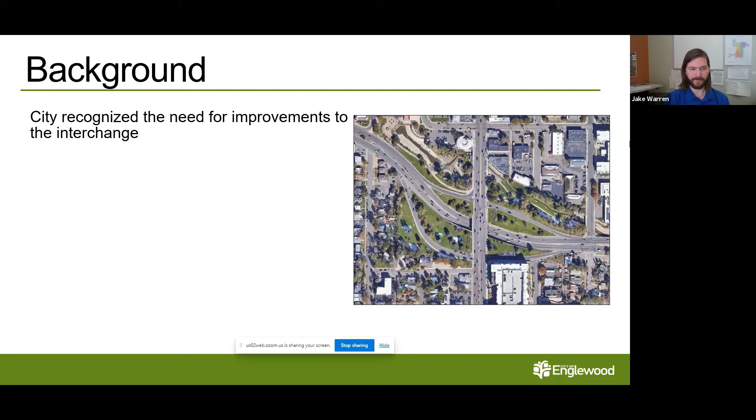So these are some of the issues that this project is going to look at, and as a regional connector with some proximity to downtown Englewood, this interchange has a big influence on the growth and economic vitality of the city. In early 2019, staff submitted an application for the Denver Regional Council of Governments 2020 to 2023 Transportation Improvement Program. Once the city was granted the funds, staff worked with CDOT to develop an intergovernmental agreement, which was presented to City Council for approval on May 28th of 2020.

This agreement, which is required for all federally funded local agency projects, sets the terms for utilizing the awarded funds. It also dictates things like which agency will manage the project, which agency will be responsible for maintenance, and when the funds must be spent by. Following execution of the IGA, the city solicited engineering services through a public request for proposals. We got 11 different submittals, and ultimately Atkins Engineering was selected as the most qualified firm.

Atkins has been working on the project since December of 2020. They've been busy establishing existing conditions, generating traffic models, researching environmental resources, and we're really diving in right now to the alternatives analysis and even getting to some of our preliminary cost estimates. Next slide, Dan.

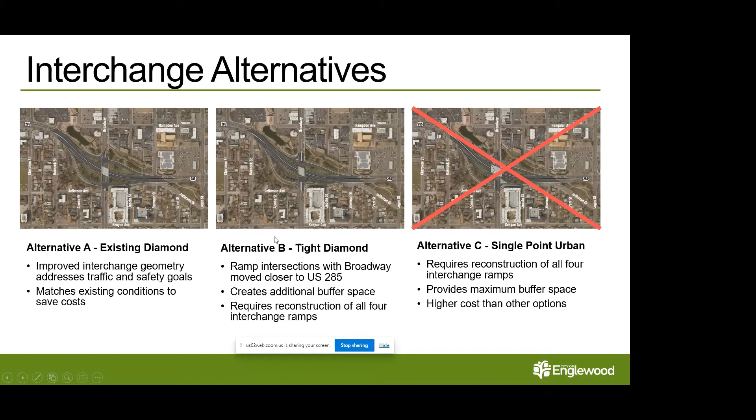So where we are today is we've moved into what we're considering a preferred alternative, which is essentially a combination of both alternative A and alternative B, picking the best benefits of each. We recognize that the additional buffer space is a benefit to the community for some additional green space, so moving those ramps in closer, like the tight diamond, is beneficial. It's moved in, maybe not quite as far—somewhere in between the two alternatives—but it still creates that buffer space. This helps minimize some of the reconstruction costs, so it's a balance.

We've also incorporated some geometric improvements. One of the bigger things you'll see is this southwest corner where we've moved the ramp a little further east, which has also shifted that intersection a bit to the north on the south side. So there'll be additional space in that southwest corner for some opportunities. And one of the benefits of the existing diamond is it creates additional storage across the bridge for turn lanes, which helps with operations and green time. So we've tried to balance that as well in the preferred alternative.

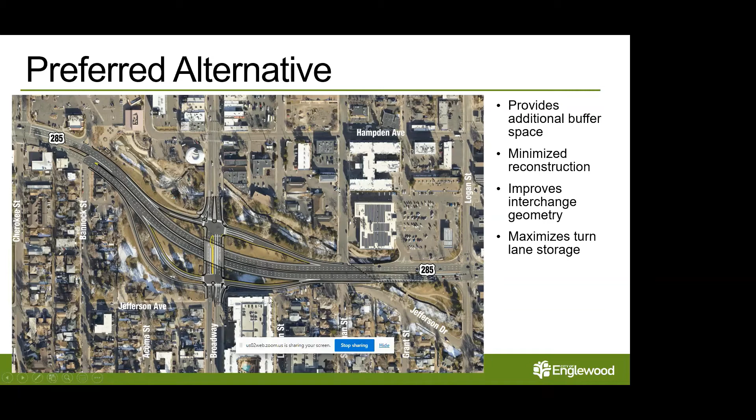The bridge width itself is generally about what it is today for the proposed bridge crossing, because there's some additional width today that's not being used on each side of the bridge. And this also maintains the 10-foot sidewalks that are out there today.

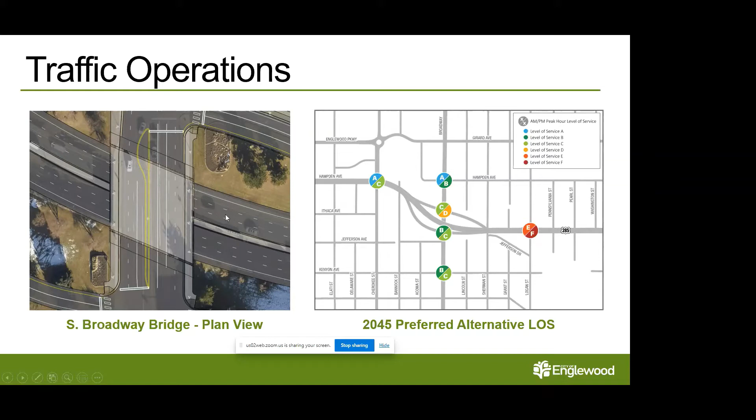From a structure perspective, we have a couple of options. One is what we call the two-span option, which is what's out there today with a center pier in the middle of 285. This allows us to keep the bridge section shallower, not as deep for vertical clearance wise, avoiding having to raise up the bridge to create that vertical clearance. So this does help us with those shorter spans.

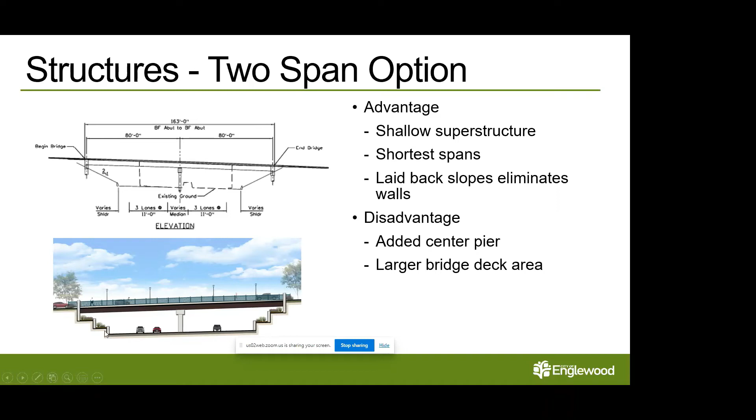Let's jump to that. So this is the other option we're looking at, the single span option, which doesn't have a pier in the middle. But in order to keep the superstructure to a manageable depth, and not have to raise the profile of Broadway, we do have the taller abutment walls, which are similar to what's out there today. Kind of creates that canyon effect.

So from a structures perspective, we're still evaluating that, but we're looking at a 2-span or a single span option and really haven't quite made that decision yet. From a cost perspective, both of those alternatives are probably within 10% of each other.

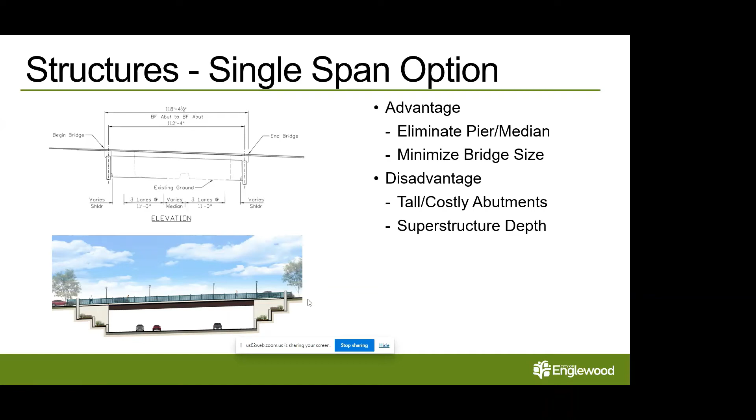One of the questions we've been getting, and we had this at the first public meeting back in February, was how we're going to build this and how this impacts traffic through the area and traffic to the businesses and those sorts of things.

So what we have here is essentially we're going to build this project half at a time. So in the first phase, we'll move all of the traffic to one side of the bridge - in this case, we would move all the traffic to the east side of the bridge, and then tear out the west side and build the west side of the bridge.

And then in the second phase, we essentially repeat the same process, just flopping it over to the other side. We put traffic onto the west side of the bridge, the new bridge constructed in the previous phase, and then we build out the east side of the bridge in this phase. And then we're essentially complete.

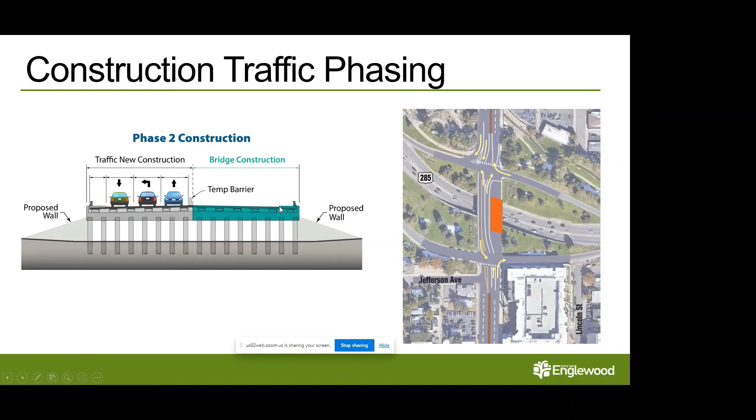As you probably saw, we're determining that configuration. We only have 3 lanes, so we have 1 lane north and south, and then a northbound left to the westbound. That requires us to close the southbound left turn movement to eastbound 285.

What we're looking at in this configuration is detouring that traffic at Old Hampden down Sherman Street, then back to 285. We picked this route because it's the more commercial business route, and we're not routing traffic through the residential neighborhoods.

And we've got signals at this location. We picked this movement for the detour because it has the lowest volumes, particularly compared to the northbound left, which has a higher volume. So this volume here is somewhat small.

We will have a public outreach campaign where we'll try to encourage drivers to find alternate routes and reduce volumes. There's probably other ways that folks can get around, but this volume here, the highest volume that we have in the peak hour, is the PM peak with about 98 cars on this particular route.

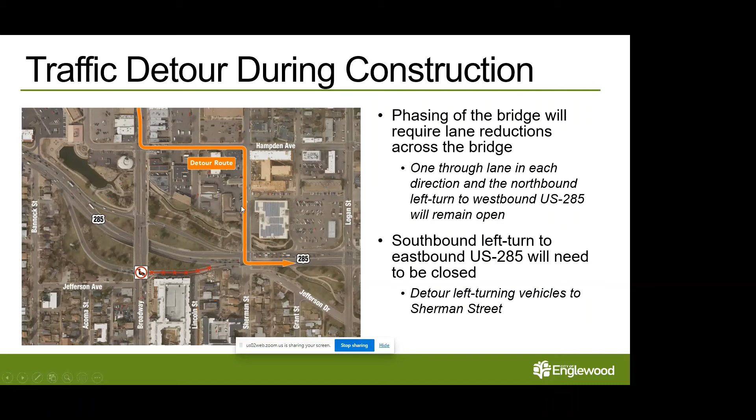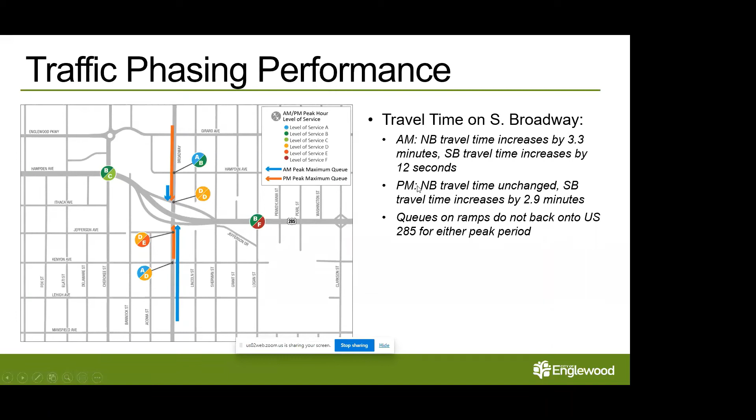So moving on from how we're going to build the project to how the project's going to look when we get done. As we talked about early on, one of the goals of the project is to create a gateway to the community. This is a key entry point gateway to the community, the downtown area of the city of Englewood.

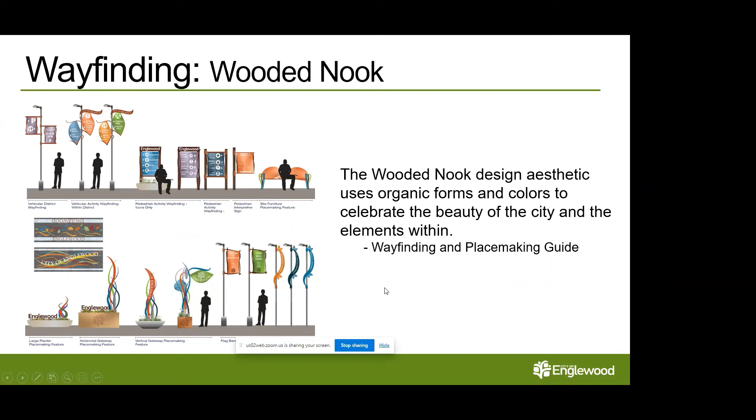If anybody has seen that guide, these are some of the elements we'll be looking at placing at strategic locations. We've got some of the wayfinding themes, entryway icons, some benches, and even some planters and things across the bridge and other areas of the project. So that's the theme we're going to build off of for the project.

So from a multimodal perspective, the existing interchange isn't great for the pedestrian environment. The sidewalks are adjacent to traffic, right up against it. So what we're going to look at is some improved, enhanced multimodal opportunities throughout the interchange.

So what you can see from the graphic here is we were going to look to try to separate the sidewalks from the roadway and create some landscaping wherever we can. Like across the bridge, we can put some planters, like from that wooded nook theme, some walks, just to create that space to make it more pedestrian friendly and inviting for walking into the downtown area. The other things we'll look at are some enhanced crosswalk opportunities to make these more friendly for pedestrians and safer.

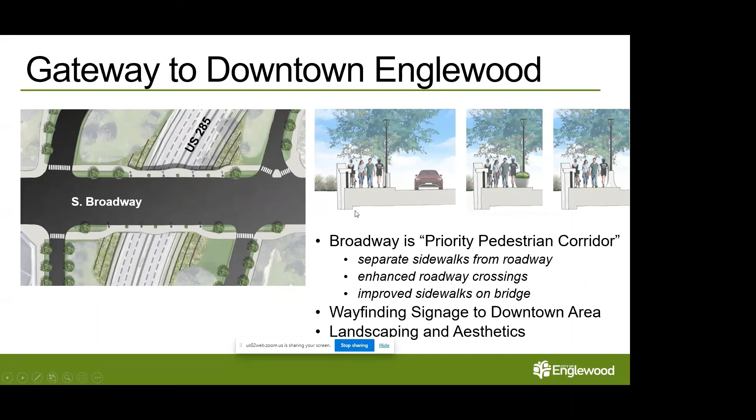We are looking at some of these right turn movements and trying to make these more pedestrian friendly. So we've kind of aligned these up so you've got better sight distance to the pedestrians. The configuration of a lot of right turns that you will see at locations like free rights is that it's more about the speed of the cars. In this particular design, we've made it more about slowing cars down, making it more pedestrian crossing friendly, and we can also look at potentially even signalizing these locations for these crossings depending on the specific location, but these right turns

should be pedestrian friendly. The other thing is, from a pedestrian crossing perspective, we try to make the shortest distance possible. So creating these in a location where the exposure where you're not protected is the shortest distance that we can. So that's the south intersection.

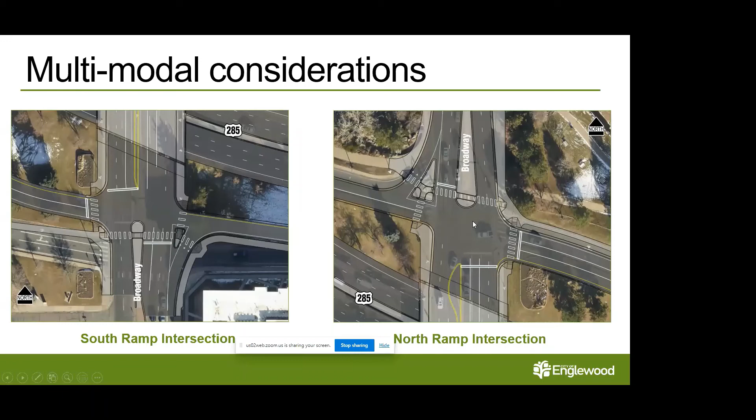So moving along, as I talked about before, the project is closing the traffic signal at Sherman Street. So by closing this signal, we also closed the pedestrian crossings of 285. At this location, we did see some accidents, in the close proximity to the ramps, and that was part of the reason to close this intersection.

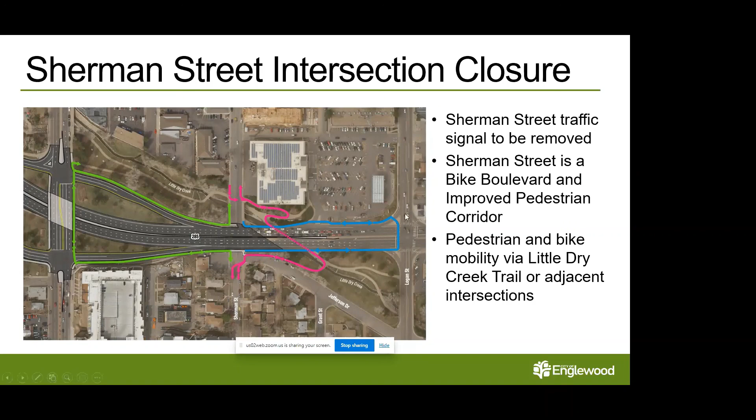So to kind of wrap up here, from a schedule perspective, where we're at is we got our notice to proceed in early December, and then have gone through that traffic study and alternative analysis phase. We had our first public meeting back in late February, and then here we are in May. So we're getting close to wrapping up our traffic analysis and selecting that preferred alternative, and then moving into the environmental aspects. This being a federally funded project, we have to go through the NEPA process with CDOT for that component of the project. Then we move into preliminary design, and then through the fall we'll go into final design.

We'll come back to a public meeting in the September, October timeframe, and then we're looking to build this project in 2022. So we'll get through the plan review approval process and look to advertise it in February, and then build it probably in the summer of 2022 from a construction perspective.

So our immediate next steps here, like I say, are getting the preliminary design plans pulled together and finalizing some of those things, looking at utilities, utility conflicts. We've been doing a lot of work out there on locating utilities, those sorts of things, getting through the environmental evaluation, and then we're working pretty hard right now on the landscape and aesthetics components of the project, the wayfinding, guide signs, and those sorts of things, and working with a stakeholder group on that particular aspect of the project. So that's kind of what we're doing here in the immediate future.